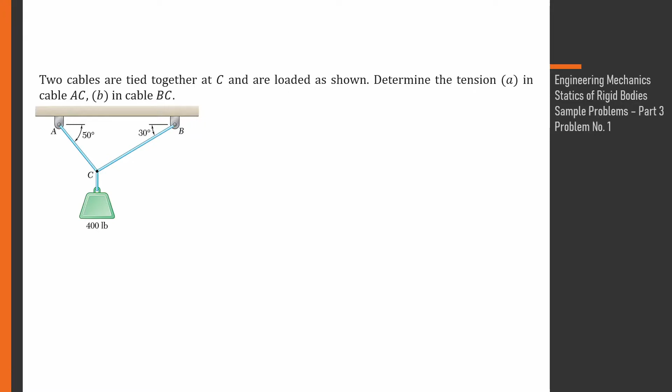As a figure, meron tayong weight na 400 pounds suspended at C, supported ng mga cable na AC at BC at angles 50 degrees and 30 degrees measured from the horizontal. Gawa tayo ng free body diagram.

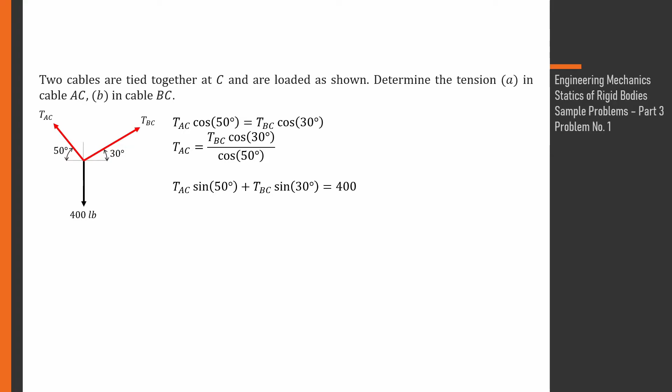So simplify natin. So nangyari dyan, yung sin 50 over cosine 50, tangent na lang. So sin over cosine. Divide natin both sides sa coefficient ng T sa BC or tension sa cable BC. Kapag finactor out natin yung tension sa cable BC, yung T sub BC, yung nasa left side T sub BC na lang. Sa right side, 400 over yung cosine 30 times yung sine over cosine 50, yung tangent 50, plus sine 30.

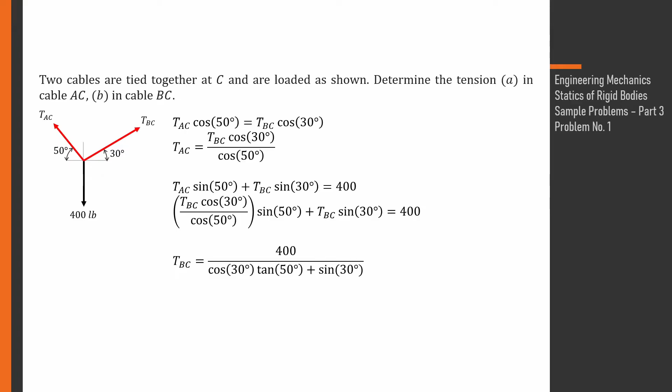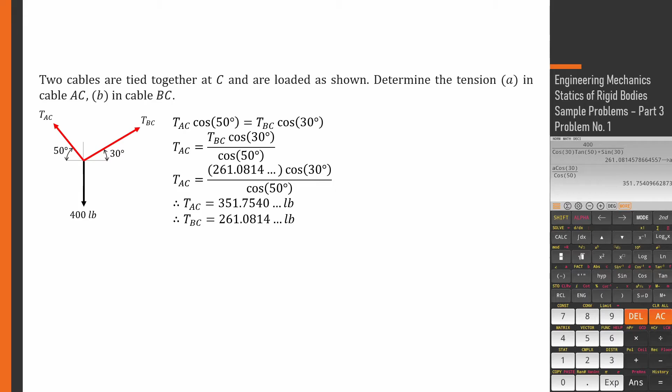So 400 over cosine 30 tangent 50 plus sine 30, 261.0814, store natin sa A. So therefore, tension sa cable BC, 261.0814 and so on pounds. So substitute natin sa unang equation. So yung A, multiply sa cosine 30 over cosine 50. So therefore, yung tension sa cable AC is equal to 351.7540 and so on pounds. So ito yung final answer natin.

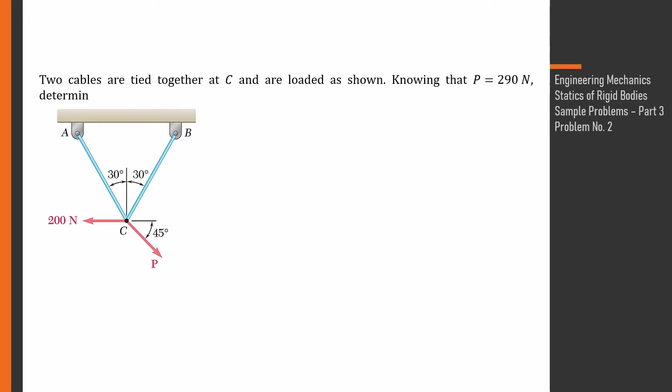Next problem. Two cables are tied together at C and are loaded as shown. Knowing that force P is equal to 290 newtons, determine the tension in cables AC and BC. So hanapin natin dito yung tension sa cables AC and BC. Nasa figure yung force P na may magnitude na 290 newtons at an angle of 45 degrees measured clockwise from the positive X or horizontal axis.

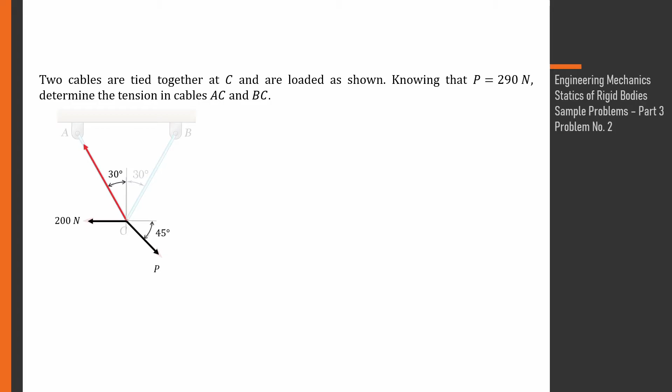Yung force P na 290 Newton. So, 45 degrees. Tapos, yung 200 Newton force, so leftward. Yung tension sa cable AC, 30 degrees from the vertical, so counterclockwise. So, tapos yung tension sa cable BC, so 30 degrees from the vertical, clockwise naman.

The summation of forces along the X or horizontal axis is equal to 0. So, when the leftward forces are equal to the rightward forces. Yung leftward forces, 200, tsaka yung horizontal component ng tension sa cable AC, yung sine 30 degrees ng tension sa cable AC. Tapos yung rightward forces naman, yung horizontal component ng tension sa cable BC, saka yung horizontal component ng force P, 290 newtons. So, kaya sine 30 degrees ng tension sa cable BC plus cosine 45 degrees ng 290.

Hindi natin directly masasolve yung values para sa tension ng mga cables. So, check natin sa summation ng forces along the y or vertical axis. The summation of forces along the vertical or y-axis is equal to 0 kapag yung upward forces equal sa downward forces. Kaya yung mga upward forces, yung mga vertical component ng tension sa cables, yung downward force naman yung vertical component ng force P.

So, kunin natin yung relationship ng tension sa cable AC at BC. Subtract muna natin dun sa 200. So, 200 both sides. Tapos, divide natin both sides sa sine ng 30 degrees. So, substitute natin sa pangalawang equation. So, ito medyo mahaba. Ito yung mangyayari. So, ito yung tension sa cable BC.

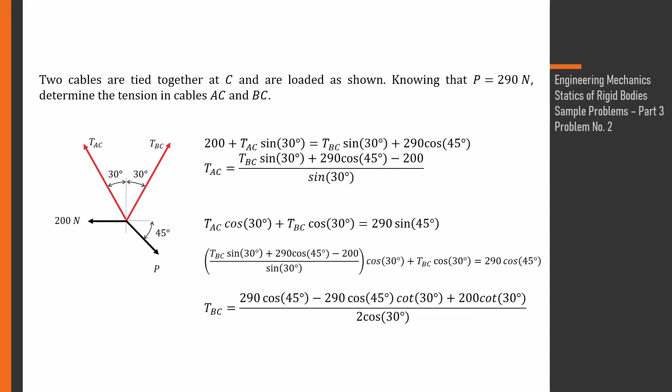So, isolate natin yung variable sa left side. So, factor out yung mga coefficient. Tapos, nagkaroon tayo ng cotangent din kasi dun sa cosine over sine. So, kaya, 290 cosine 45 minus 290 cosine 45, then cotangent 30 degrees plus 200 cotangent 30 degrees over 2 cosine 30 degrees. So, store natin to sa A. So, tension sa cable BC is equal to 113.3310 and so on newtons.

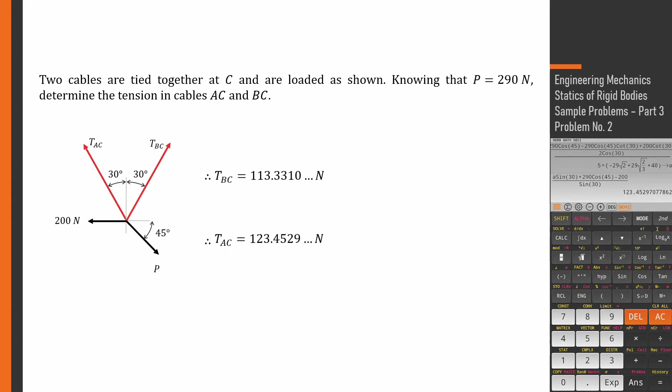So, substitute natin to dun sa unang equation. Kaya, yung store sa A, sine 30 degrees plus 290 cosine 45 minus 200 over sine 30 degrees. So, therefore, tension sa cable AC is equal to 123.4529 and so on newtons. So, ito yung final answers natin. Tension sa cable AC is 123.4529 newtons, tapos yung tension sa cable BC is 113.3310 newtons.

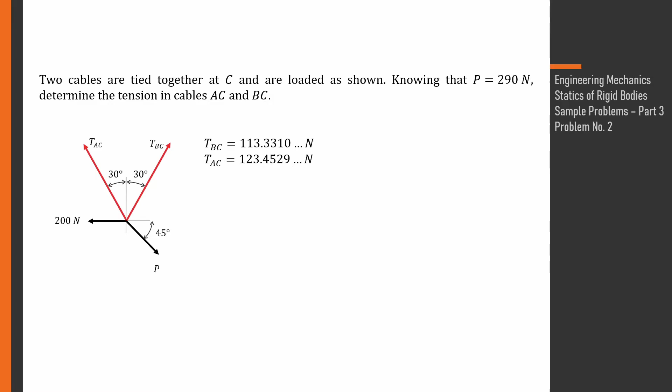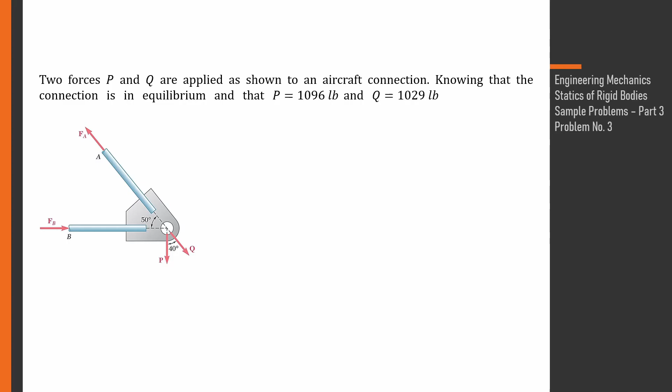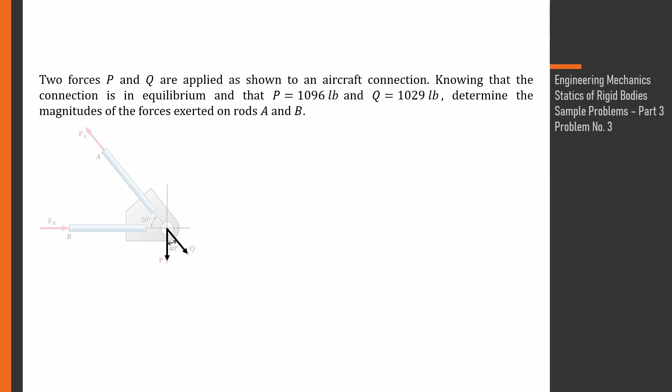Next problem. Two forces P and Q are applied as shown to an aircraft connection. Knowing that the connection is in equilibrium and that P is equal to 1,096 pounds and Q is equal to 1,029 pounds, determine the magnitudes of the forces exerted on rods A and B. Gawa tayo ng free body diagram. So force P and Q, 40 degrees, tapos yung force along rod B, tapos yung force along rod A.

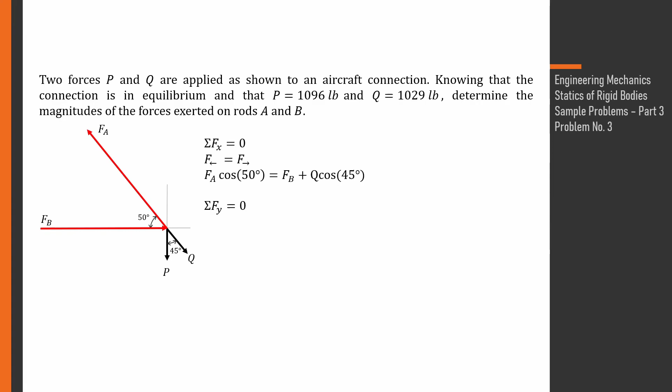So labelan natin. Summation ng forces sa X or horizontal axis equal to 0 kapag yung forces sa left equal sa forces sa right. Kaya cosine 50 degrees ng force along rod A na leftward force equal sa force along rod B plus yung cosine 45 degrees ng force Q. So wala pa tayong makuha dyan. So check natin sa vertical axis. Upward force is equal to downward forces. Kaya upward force na sine 50 degrees force along rod A equal sa downward force na P plus sine 45 ng force Q.

So dito pwede natin makuha yung value ng force along rod A. Kaya divide natin both sides ng sine 50 degrees. So 1096 plus 1029 sine 45 over sine 50. So store natin sa A. So force sa rod A is equal to 2380.5575 and so on pounds.

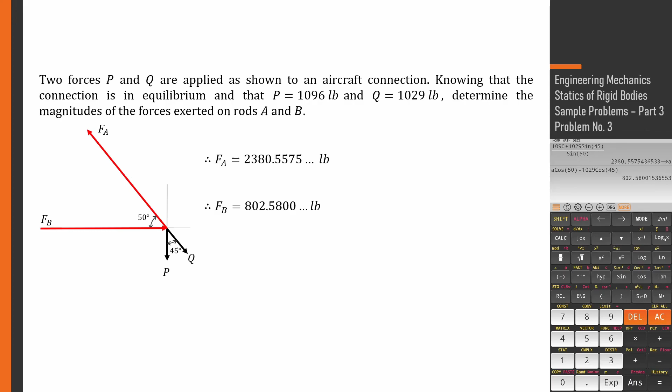Substitute natin sa unang equation. So yung nakastore sa A, cosine 50 degrees minus 1029 cosine 45 degrees. So therefore, force along rod B is equal to 802.5800 and so on pounds. So ito yung final answers natin. Force along rod A is equal to 2,380.5575 pounds at yung force along rod B is equal to 802.5800 pounds.